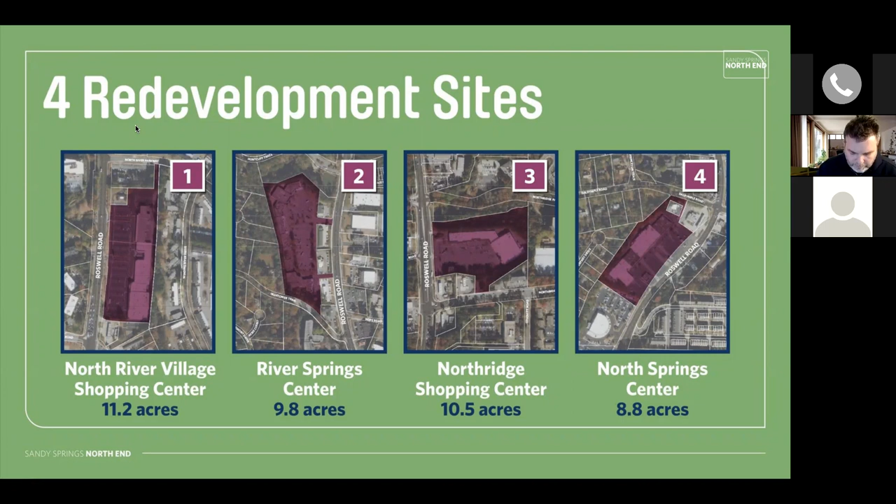For those of you who have been with us throughout this entire planning journey, you are very familiar with the 4 sites that we have. But if you have not, we have the North River Village Shopping Center up on the northern end of Roswell Road, River Springs Shopping Center, which used to be Loehmann's, Northridge Shopping Center at Northridge Road and Roswell Road, and finally North Springs, which used to be Big Lots.

Just a reminder of what this plan is. It's essentially a conceptual exercise. We're just looking at what is feasible, what's not, how these sites and similar sites could potentially be redeveloped in the future. We also wanted to understand the community's preferences for future development and represent that in our finalized concepts. What it's not is a zoning exercise, as in we're not rewriting the code, but we are making recommendations to change the code to make design better and any kind of redevelopment work better. This is not by any means a final design for all 4 sites. In fact, we even have 3 per site. So it's just kind of an ideas exercise.

The goals of this have been to ensure a variety of housing options to accommodate all types of residents, to improve multimodal connectivity throughout the North End, starting with these 4 sites and Roswell Road. We've wanted to model how mixed-use environments can work in Sandy Springs, build upon the existing green spaces and parks to create a cohesive public space network, and attract and support local businesses within the North End.

What we'll deliver is, again, 3 illustrative concepts for each of the 4 sites. One conforms to the current code requirements. The next one is a little bit more creative and requires minor adjustments. And the third one, we could just think completely outside the box and may not be bound by the code. Then with those, we will have rough cost estimates of each concept, some financial feasibility for each one, and then recommendations for funding and zoning amendments.

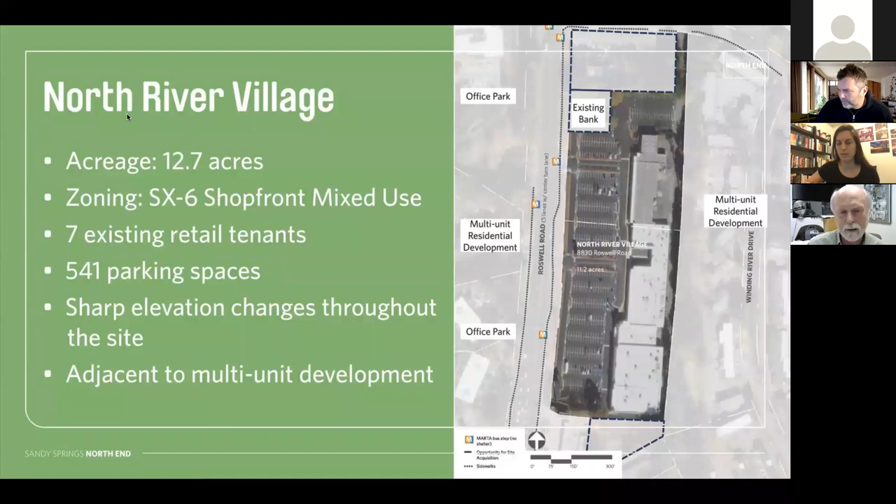Since the last schemes we've shown you, there was a good bit of interest and discussion around the idea of looking at additional green space on all the sites, but especially this one. As Jonathan and Sarah have said, this whole study is about trade-offs, and we're going to be talking about how we achieve that additional green space, because somebody has to pay for it fundamentally. So in options 1 and 3, which are the denser of the three schemes, we are looking at the addition of a 1-acre public park that was not part of the schemes previously.

We've also excluded from the analysis some of the infill development we had shown previously as a possibility to the east of the North River site, so that's no longer part of the image you'll see. And finally, in the third, most dense scheme, we've looked at even taller buildings than what were considered previously, just to see how that might change the financial picture for the options.

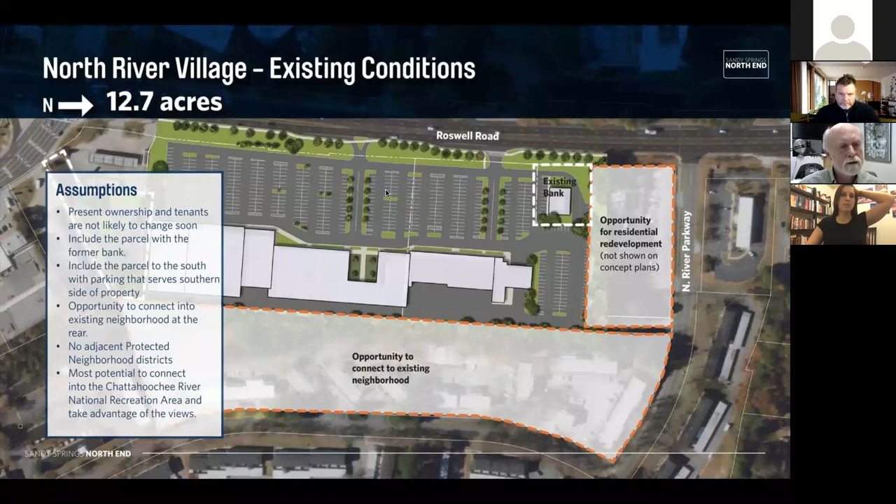That courtyard in this scheme has survived as a 2-story courtyard space that would be a food hall and the entertainment focus of this neighborhood, with some office perhaps on the upper floor. Immediately in front, where there was an additional mixed-use block with a parking garage, that has now been replaced by the park I described, and a smaller block of townhomes. That's where the P2 indicator is, and those represent the 2 perspective drawings, the 3D massing studies you're about to see.

With the removal of that block, that reduced the density of this plan. So option 1, the vertical mixed use scheme, essentially achievable with minor changes to your existing code, would yield a total of 524 residential units. You see the summary in the lower right, and a substantial amount, 130-some thousand square feet of commercial. That residential density is about 41 units per acre.

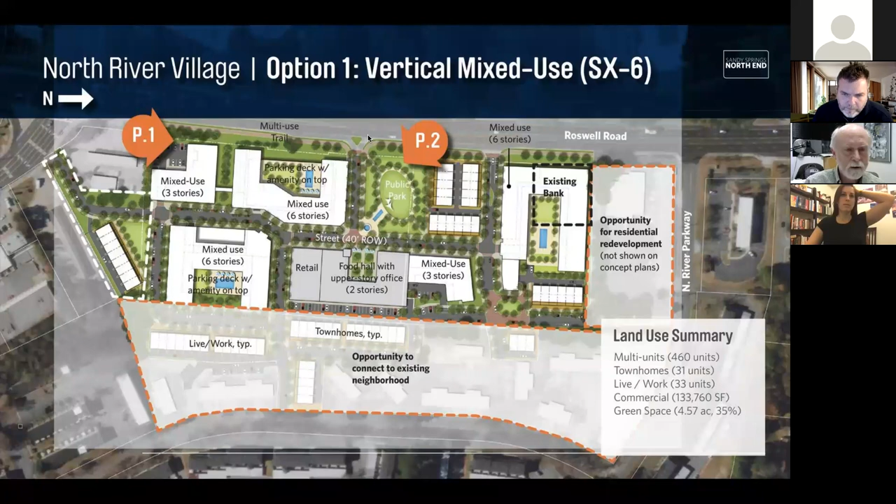If we go to the next slide—remember, this is not intended to represent the architecture per se, this is just basic massing—so what does that density look like on this site?

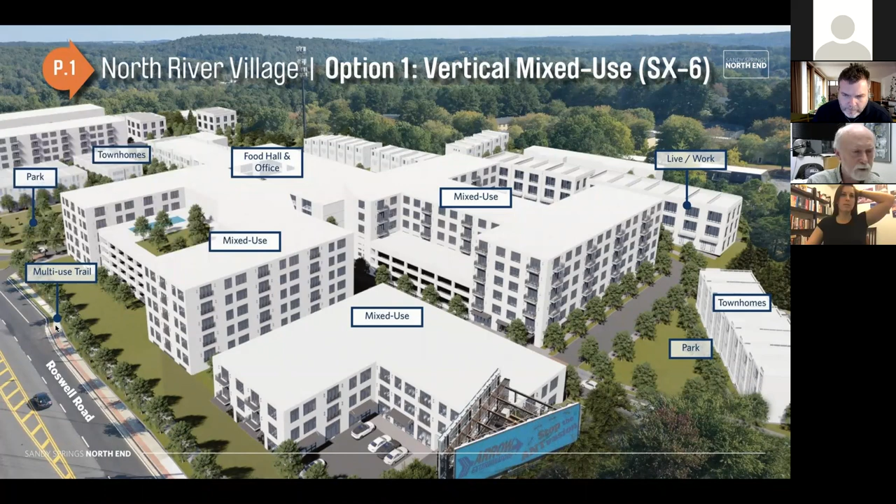In the first of these two 3D drawings, you see Roswell Road to the west in the lower left corner, and you can just barely see the 1 acre park on the left side of the screen. This gives you an idea of the massing that scheme might represent. You see there are some parking structures that would be partially above grade, visible from Roswell Road along the frontage and deeper into the site. Those can be concealed with landscaping, but they're there.

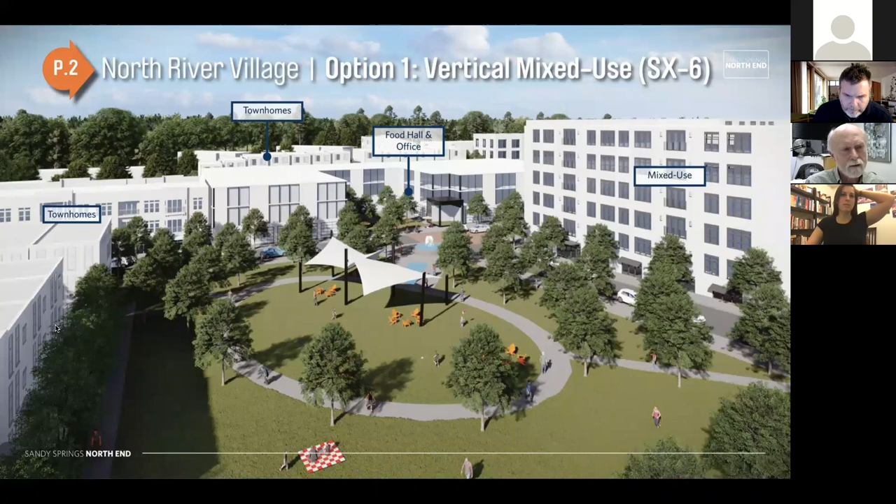This is a view looking into that 1 acre park, to give you a sense of the scale of that space, and again the trade-off that would represent. This would clearly be a desirable thing to have, but because it has to be paid for somehow, the next slide talks about some of those trade-offs.

This is a bit of an issue with any of the mixed use higher density schemes you're going to see, because they all require structured parking to provide enough parking spaces. And what we've concluded is that of the 4 sites we've looked at in this part of Sandy Springs, the rents achievable there would make it difficult to justify the expense of structured parking.

We're not quite there with the rents that market rate would achieve in those areas, but we think it's doable here. This is probably the most likely of the 4 sites where that would be more attainable in terms of rent structure, because of the proximity of the river and the fact that the city is engaged in a river access study now that would provide access fairly near this site.

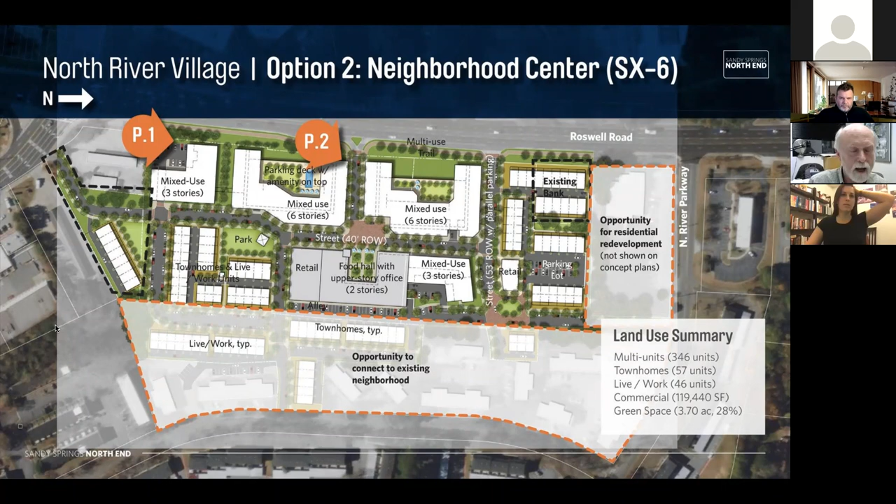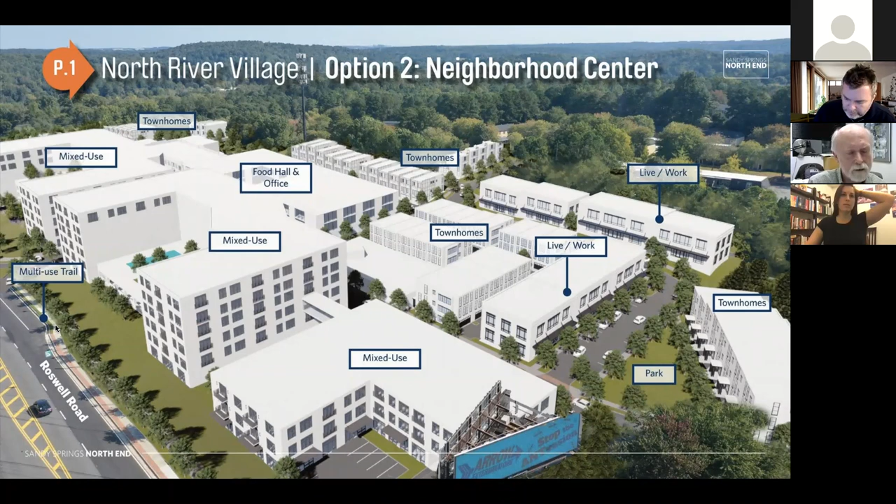And again, the same view looking from Roswell Road, or similar view. This gives you a sense of what the multi-use trail might feel like as you pass along the frontage, with a combination of 5-6-story buildings and some lower garage structures. This garage structure may in fact have only 1 floor exposed to view, depending on how the grading is done.

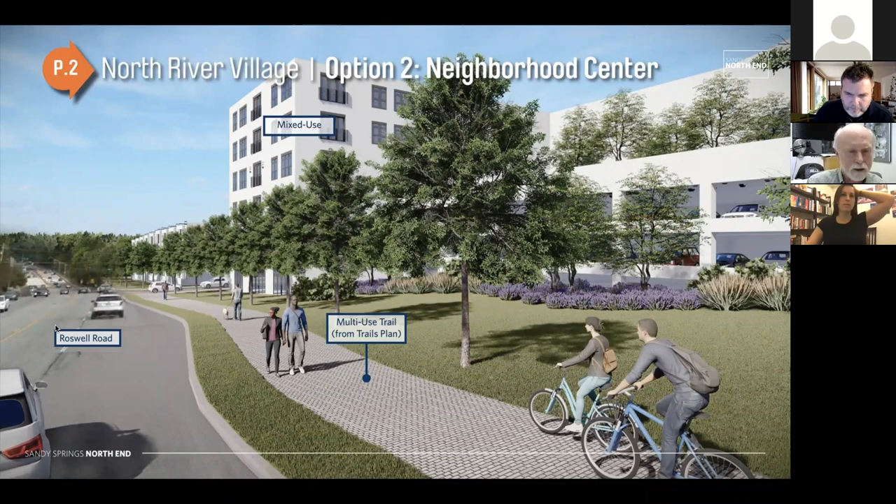So next, we'll talk about feasibility of this scheme. This one also works, it's a green light. The reason it works at a lower density is that we're not trying to pay for that 1-acre park. So again, trade-off.

Otherwise, I think this outlines some of the things we would suggest in terms of adjustments to the code to make this kind of plan work, some of which apply to the previous scheme as well. But they have a lot to do with the way standards are currently set for how townhouses are built. We would want to permit smaller lots and maybe narrower streets.

And then some of the structural requirements currently in place for taller buildings, if possible, we would want to see those adjusted. All right, and then we have one more scheme on North River, which is, as I mentioned, looking at what would happen if we went to taller buildings. This scheme looks essentially identical to scheme 1, option 1, except that we get substantially more density.

Instead of 524 units, this one would yield 892. So that goes up to 70 units per acre. With that kind of density, the idea represented here is you could pay for a park.

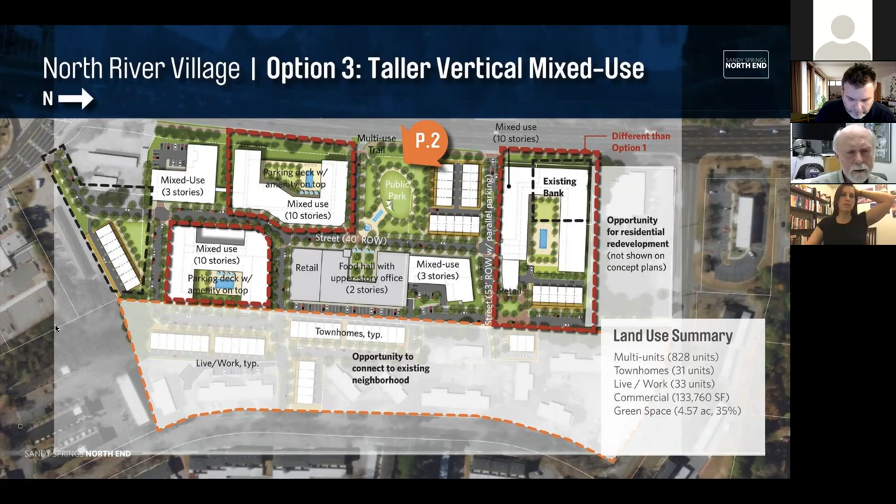You could probably also start to provide a substantially larger number of affordable units, keeping in mind what Jonathan said, that taller buildings are more expensive to build, but still that added density gives you more latitude to provide that broader mix of price points. So I think those are the options there.

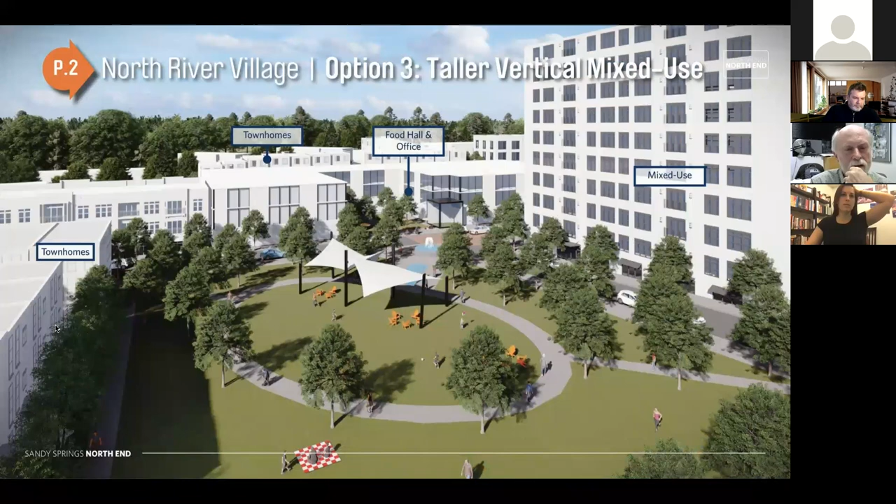One more page that looks at views from the ground level. We had 6-story buildings, now we have 10 shown in these views in some of these locations. Certainly that's a different impact, but from the ground, it probably doesn't feel all that much different, honestly.

Again, green light, same concerns or issues regarding how we might need to change the code. So that's sort of the story on the North River site.

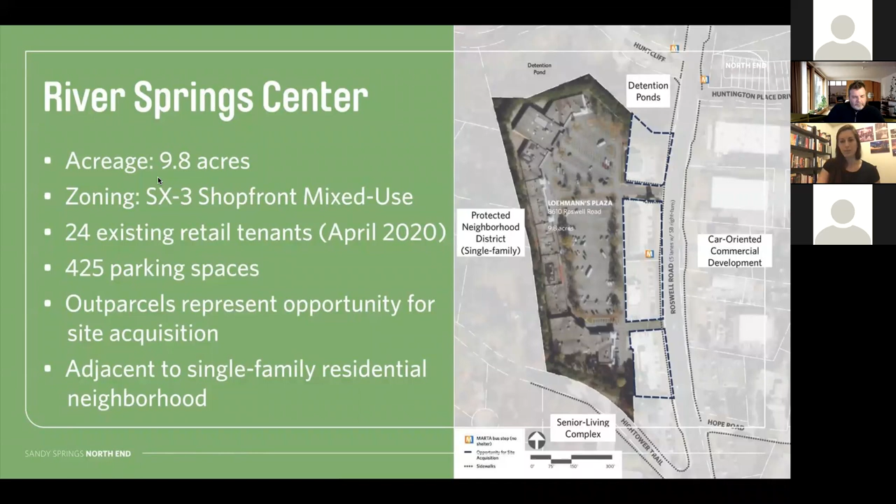Again, this is the existing conditions, north is to the right. Our assumption on this site is that it's better suited for residential because it's separated from Roswell Road, so commercial development wouldn't be as visible, and it would serve as a transition into the existing neighborhood to the west and north. We're also trying to keep the amount of commercial space on any of these sites relatively low, just because of the demand. These parcels outlined in red are opportunities to connect into the site.

We used all three of the access drives as our new street locations. And as Bill mentioned, some of this may need to happen in phases, so we looked at where we could divide the site into feasible blocks for phasing of the redevelopment.

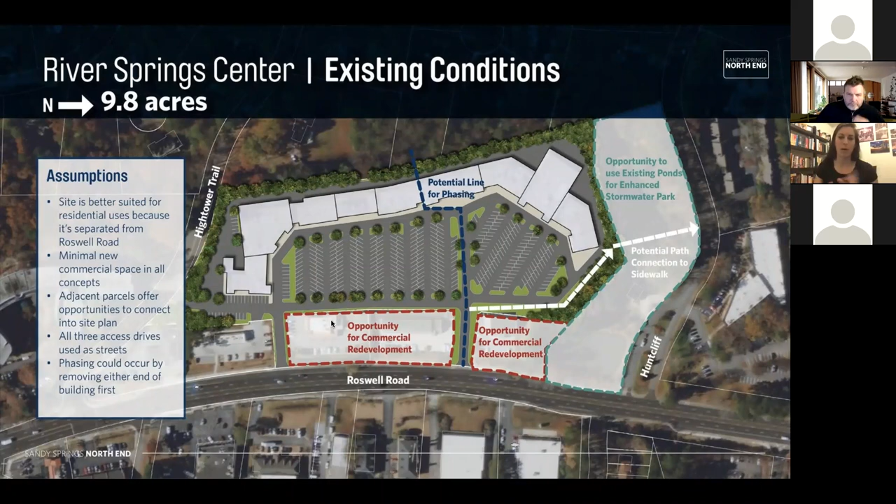So this is the first option, which meets the current code. All of the buildings are 3 stories tall. Any building that faces a street must have commercial on that street, so most of these are mixed use buildings.

We have the street coming in from Hightower Trail over to the one that leads into the parking deck for the mixed use building, the larger mixed use building. And then we have a smaller green space between the smaller buildings over here that could be activated by the commercial on the floor there with some multi-units on the top.

Another great opportunity we found, which we didn't fully design out but created a concept for in later versions, is this green space currently owned by the Huntcliff HOA, but there's a lot of stormwater detention there. Maybe there's an opportunity to create a usable green space out of that.

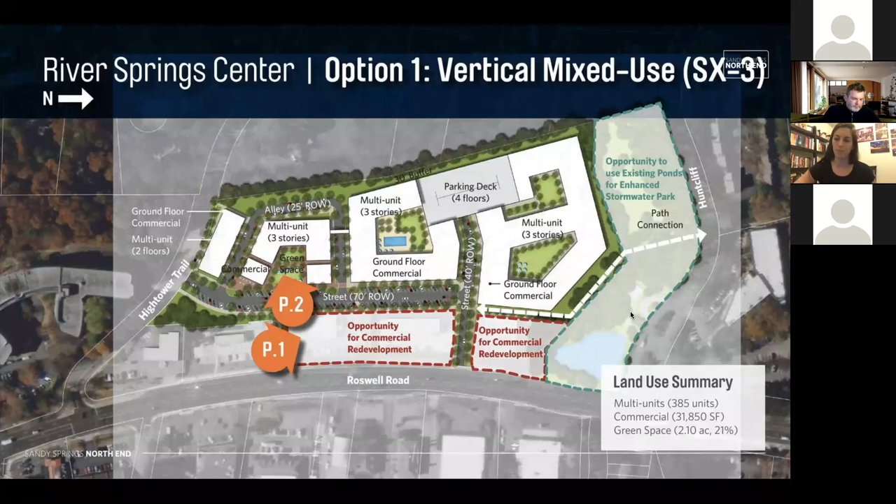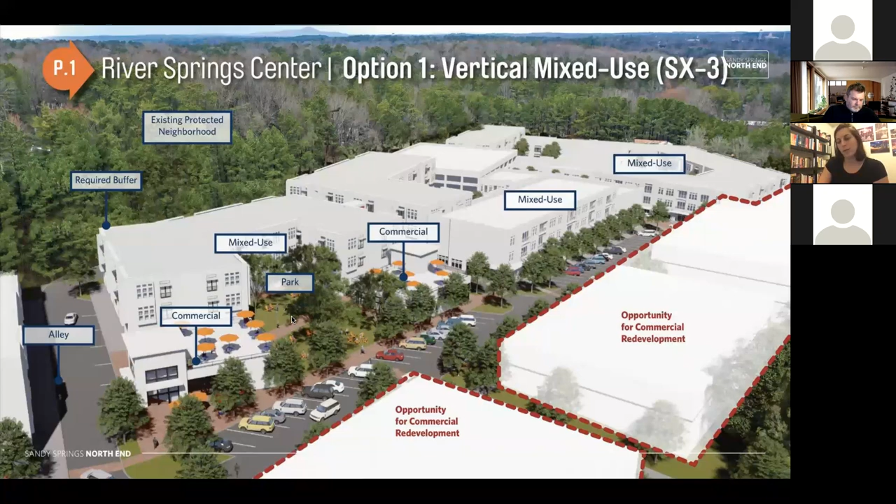This is showing the site looking north, showing how just massing these buildings in here relates to the proposed buildings. The green space here will be the eye level view right here from the street looking into that little plaza and green space with restaurants or any kind of commercial and residential around it.

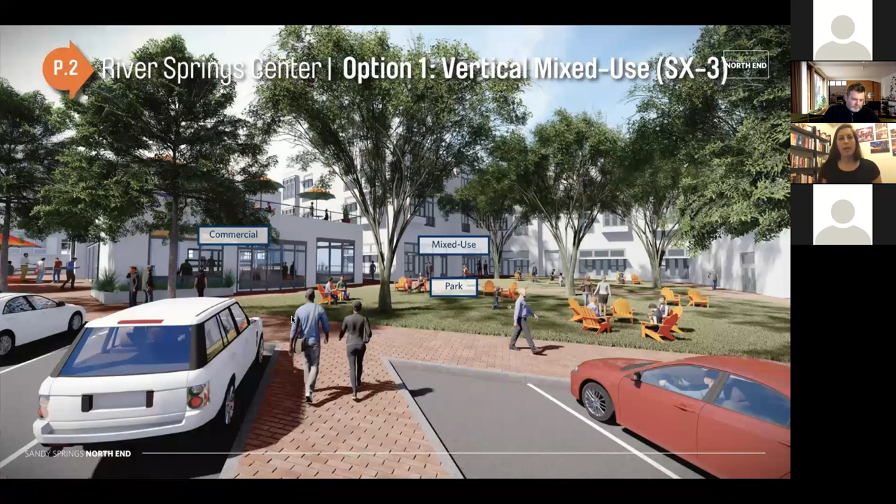This option works financially. However, as Bill mentioned and as Jonathan has mentioned, the structured parking does require higher rents, and it makes it a little harder to make it work for providing some of that attainable housing. With these mixed use scenarios, you do need the structured parking in terms of taking up less land. And while this works financially with the code, it doesn't allow as much creative design.

So if we wanted a larger green space, that would likely push it to the point that it might not work. So that's some of the challenge of the current code.

Along with that, the requirement that ground floor commercial needs to be on all streets within the development may lead to too much commercial space. And finally, some of the street width and design requirements in the current code limit the amount of developable land. So we would maybe need to squeeze those down a little bit to fit more green spaces or a little bit bigger buildings.

This second one here focuses more on missing middle housing. There are no parking decks on this one, but a range of housing options with townhomes, small multifamily buildings with 6 units each, some live-work, townhomes over flats that function like a duplex but vertical, and then some single family homes.

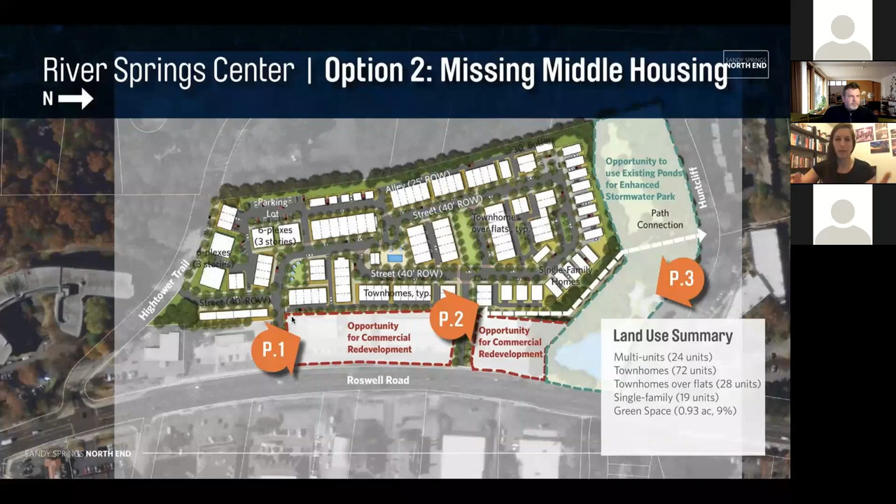This is a view again looking north at this site, showing how the commercial development could relate to the townhomes across the street, and some of these smaller pocket spaces between the buildings that start to make it feel a little more like a neighborhood.

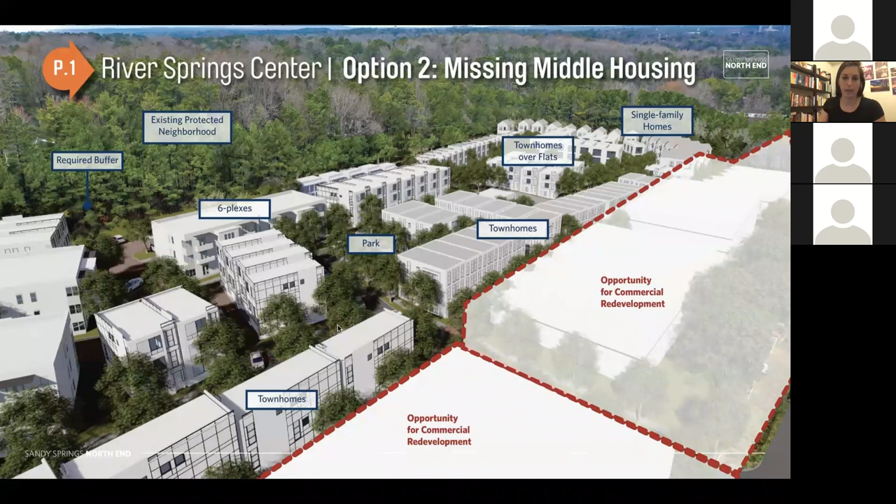And then this is looking from the northern end of the site, looking west into the single family homes and some of the townhomes over the flats, that potential enhanced stormwater park.

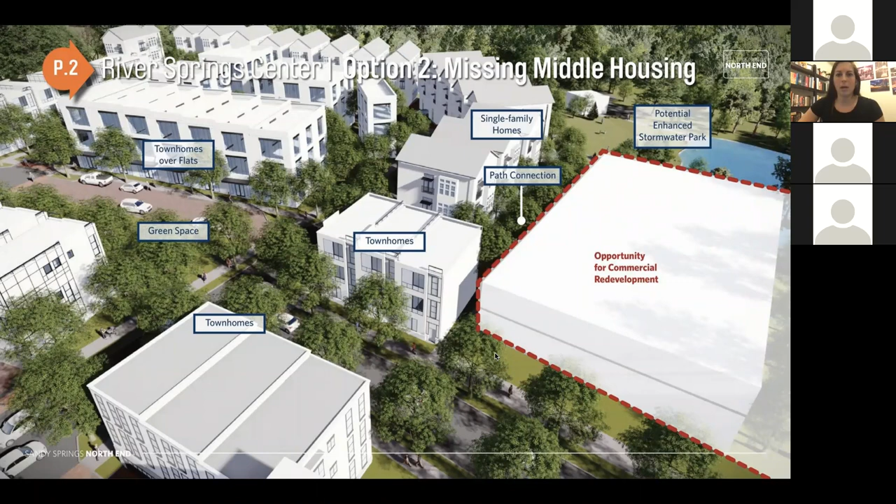And then if this current site that's a 1-story commercial were to redevelop, here's how that could look. This is showing just an example of a stormwater park, making use of the pond that exists there now, and how the buildings could front it and people could use the space.

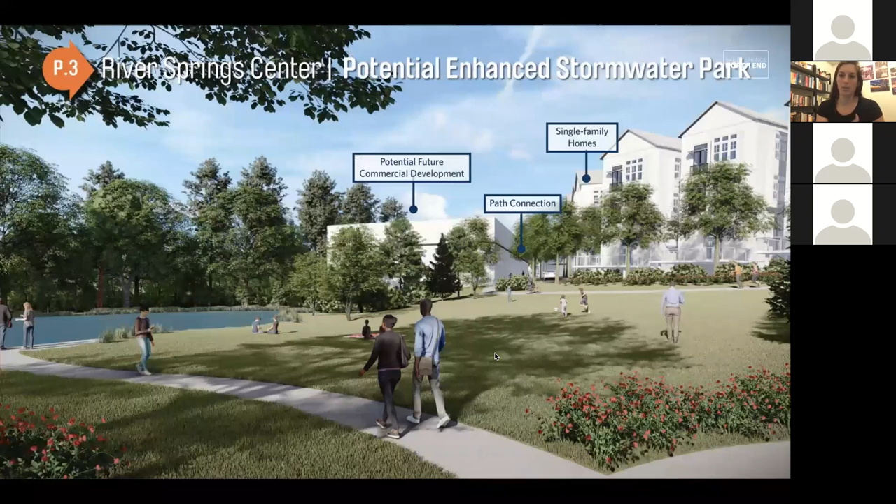This one actually does not work financially. It's mainly because the land acquisition and preparation costs exceed the potential revenue from reselling the lots and building the different types of housing. A lot of this is probably because the density is relatively low.

To make up that difference, there are things we could do, maybe keeping some of that mix but changing some of the design, and maybe that would help.

One way to make this work by the code is potentially rezoning it to a different zoning designation that already exists, or also reducing lot sizes for multi-unit townhomes and single-family detached units, and then again addressing the street width and design requirements.

This next one kind of combines the thought processes of the last two, combining some of the missing middle housing with a larger multi-unit building, keeping some of that retail and office mix, but with a much lower amount of commercial space. We have some live-work units, a small mixed use building on the southern end, townhomes, and then a larger multi-unit building that would be 5 stories, stepping down to 3 stories in the back.

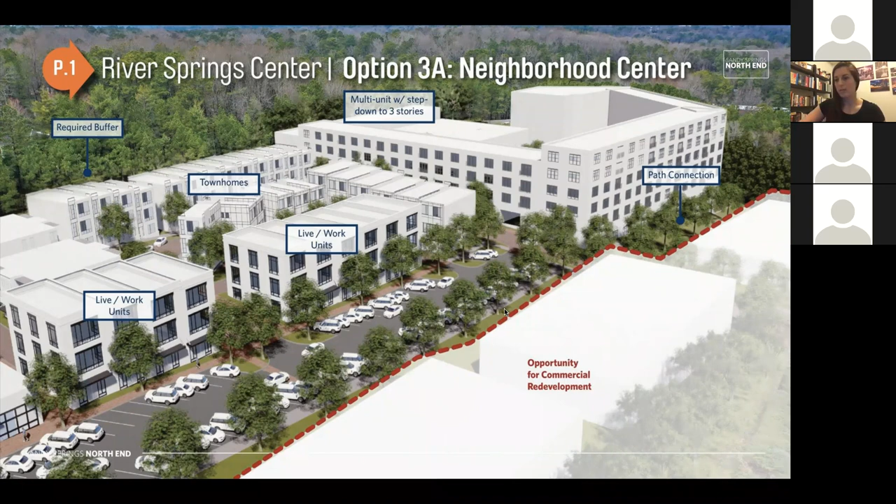This is showing what that would look like. You can see the building step down—5 stories closer to Roswell, 4 towards the middle, and 3 in the back. Some of the townhomes and live-work units face that new street, relating to the potential commercial redevelopment. And this is looking into that same green space park.

This one does work financially, but the structured parking could tip that, depending on how many units end up there and how big the building is.

In order to make this work by code, we would need to rezone either to RX5, a residential mixed use designation that allows taller buildings up to 5 stories, or SX6 with some minor modifications—allowing standalone multi-unit buildings, potentially height bonuses for taller multi-unit buildings based on incentives, and removing the steel and concrete construction requirements above 3 stories.

You can build a 5-story building using wood frame construction and make it more affordable.

And finally, the next one is that one, but the corner to the north is more townhomes and single family homes, townhomes over flats. So again, this is more focused on missing middle housing.

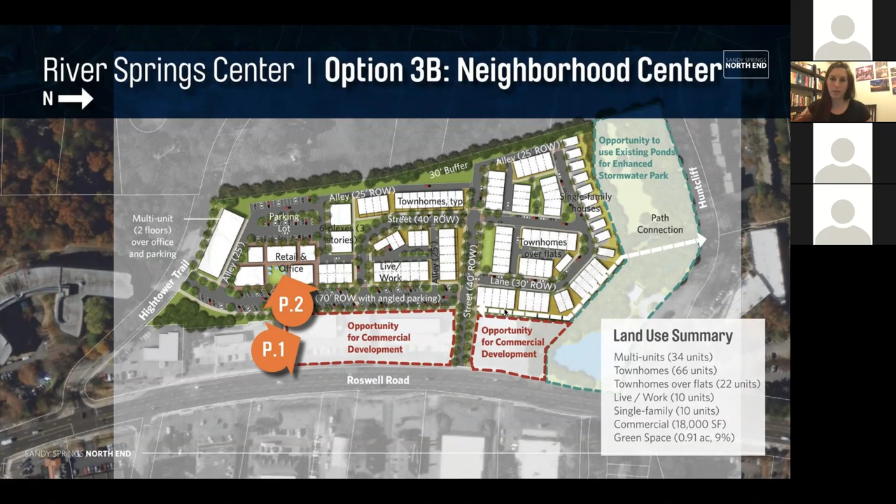There's no structured parking here. Everything is a parking lot, on-street parking, or the townhomes with their parking underneath. So this just has more of a focus on missing middle housing as well, with a little bit of retail and office on the southern end.

Sarah, can I interrupt real quick? You just said the word missing middle again. We had a question—can you define what missing middle means, please, for the group?

Generally speaking, we usually build the larger single family homes or the larger apartment buildings, and missing middle housing is kind of those smaller buildings in between, like the townhomes, smaller apartment buildings that you would see in older neighborhoods and things of that nature. If Bill wants to add more details, he's welcome to, but it's meeting that range of unit types that we don't typically see anymore.

Yeah, it's generally a strategy that other cities have tried to pursue. It's the way we used to build towns. Atlanta used to have all kinds of these missing middle building types that allowed for less expensive construction that still achieves greater density than a typical single family or townhome community might, and more diversity, and allows you to deliver more affordable, a mix of price points more affordably than going to the tall buildings that Jonathan was talking about.

So I think it's one of the things we wanted to explore in these schemes, and certainly this site that Sarah's working on has looked at how those options compare with those where you're pumping the density up with an apartment block, or a multi-unit block with structured parking.

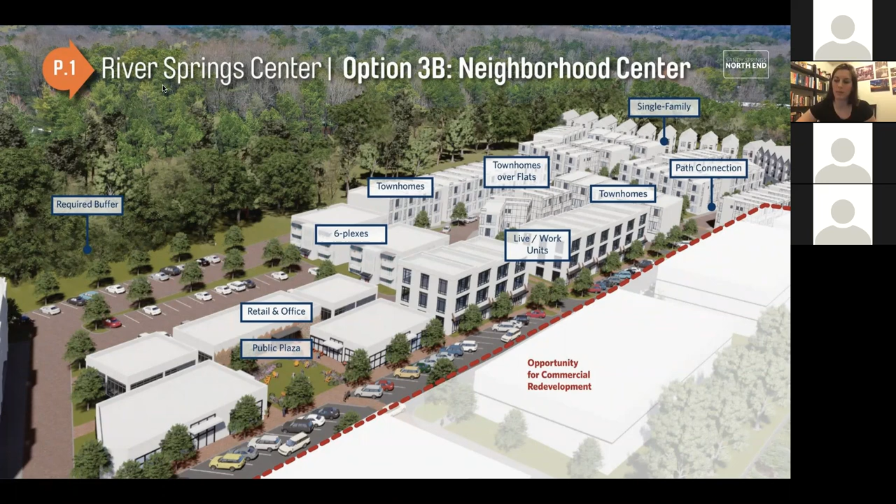Yes, so as we can see here, it does not work. Again, it's that land acquisition and site prep costs that Bill just mentioned. We could make it work by code, but we may need some kind of combination of a higher density building and some of these missing middle housing types with smaller buildings and fewer units.

So here's the next poll question about River Springs. We'll give you a moment while this question is being answered, and I think it's a good opportunity to answer some questions we're getting from multiple people that relate to all of these.

I'd like to ask Jonathan to talk a little bit about affordable housing. We're getting a lot of questions about whether these plans include affordable housing. Jonathan, if you wouldn't mind addressing whether or not those are included in any of these plans. All right, why do I always get the easy questions?

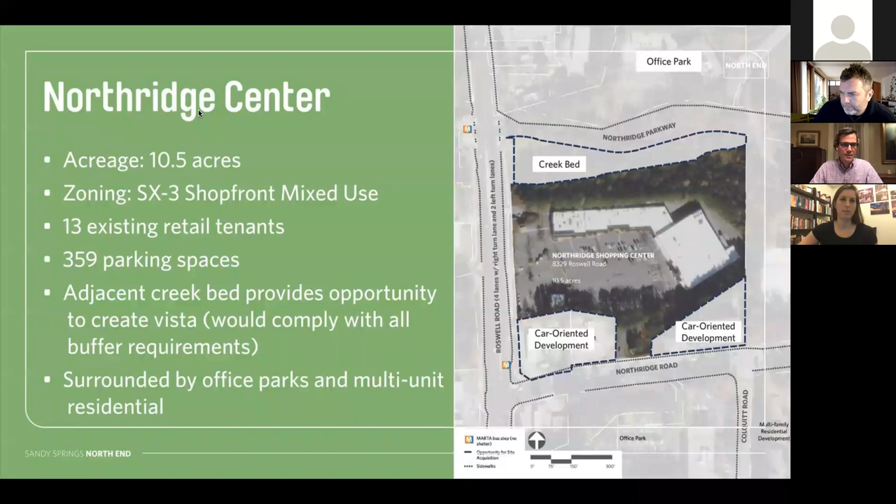Go to the next slide. So the Northridge Center, located here, essentially at the intersection of Northridge Road and Roswell Road. Primary frontage is along Roswell Road here with access off of Northridge. Same zoning as the last site Sarah reviewed, the SX3 shopfront mixed use. This center has 13 existing tenants, one currently in the old Kroger space, the large part of the structure that's currently Goodwill. And again, interesting topography on this site as we've seen in the previous two sites, with Northridge being the high point and starting to drop off. If we want to go to the next slide.

So what have we changed since we last spoke? Originally, we showed an option that tried to keep the Goodwill, but that was a really tough design to make work. So today all 3 options will assume that the Goodwill structure can be removed, and we're also adding connections to the multi-use trail along Northridge Road.

Some additional assumptions here: the site doesn't have great visibility because of the topography from Roswell Road, and there's extremely limited visibility from Northridge, again because of how the topography works on this site.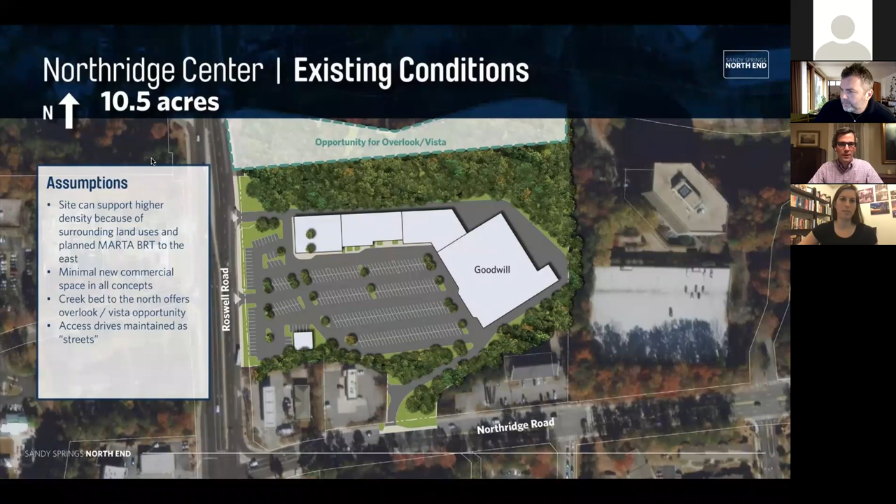The site does offer some great views to the north, though. Essentially all that wooded area behind the current shopping center, the topography drops off into a creek bed, actually an active stream, and it's quite lovely. We wanted to make use of that in our conceptual plans and highlight it as a feature. Because of the limited visibility, we see minimal commercial potential here, with more focus on the residential aspect.

Next slide. So now we have option 1, keeping with the existing zoning. As you can see, we have 2 different residential types here, giving us a total of 148 units on site. We're limited to 3 stories maximum with the existing zoning.

Based on that, we're limited on how much density we can put on the site. The buildable area for the site is relatively limited because we have a lot of topography constraining that. So with this site, we're offering some retail, pure retail buildings along Roswell Road as you enter, then coming into mixed-use structures with commercial storefront on the ground floor and residential above.

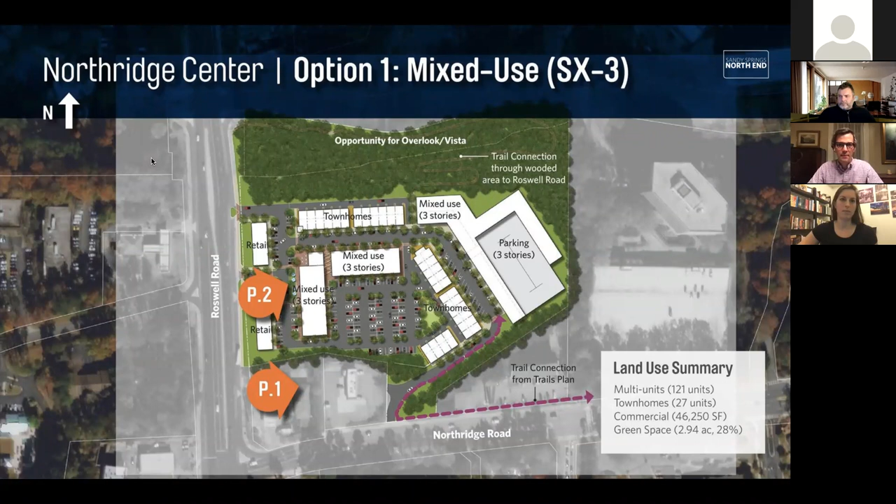We're also assuming that with a conditional use permit under the existing code, we can implement some townhouses as seen here, and then a larger mixed-use building in the back that would have a parking structure.

Next slide, we should be able to see some views of how this might look. This is looking northeast with Northridge Road in your lower right-hand corner. You start to see how these structures might form this space. The larger mixed-use building needs a parking structure because of the limited buildable area, with the remaining structures either self-parking like the townhouses, or making use of surface lots.

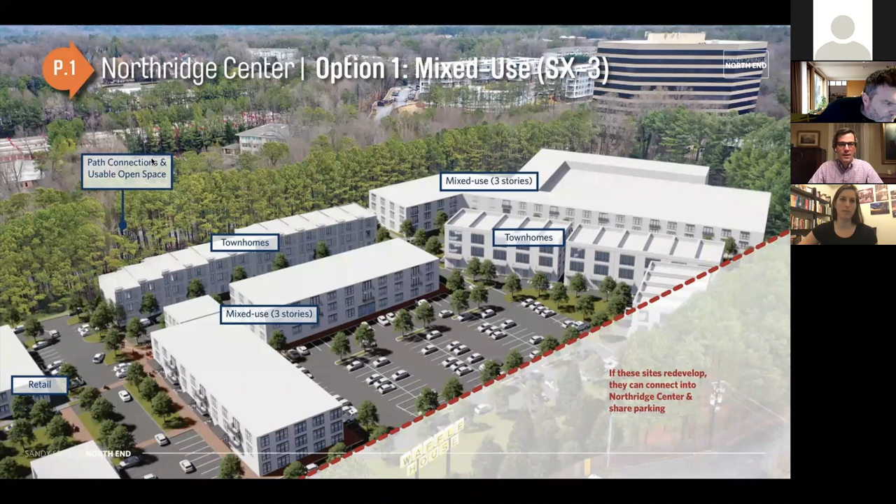Next slide. Unfortunately, this one is not financially feasible based on the grading criteria. Essentially, just from the land acquisition and prep cost involved, we're not getting enough density on site. There are 148 units here, which puts it at 14 units an acre. Challenges with the code: the ground floor commercial is putting too much commercial on this site, and the existing street designs take up too much room, not allowing us to go vertical to make this work.

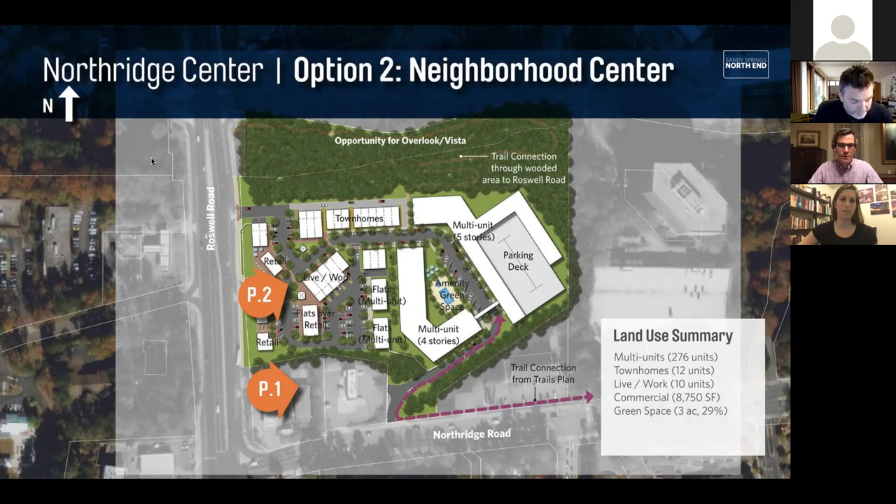Again, you can start to see we're trying to work with the building locations to open up as much plaza space as possible. As you can see next to that P2 arrow, it's pointing towards one of the plaza spaces, which we'll see in one of the renderings shortly, as well as opening up some amenity space for the multi-unit buildings on the east part of the site. We start to get some nice green space and pool space for those uses. Go to the next slide.

So you start to see how the massing works here, and you'll especially see this in our third option. The ability to go vertical actually fits in quite nicely at this site, being next to the high-rise office building to the east, which is about a 12-story building. There's also some complementary multifamily adjacent in the area as well.

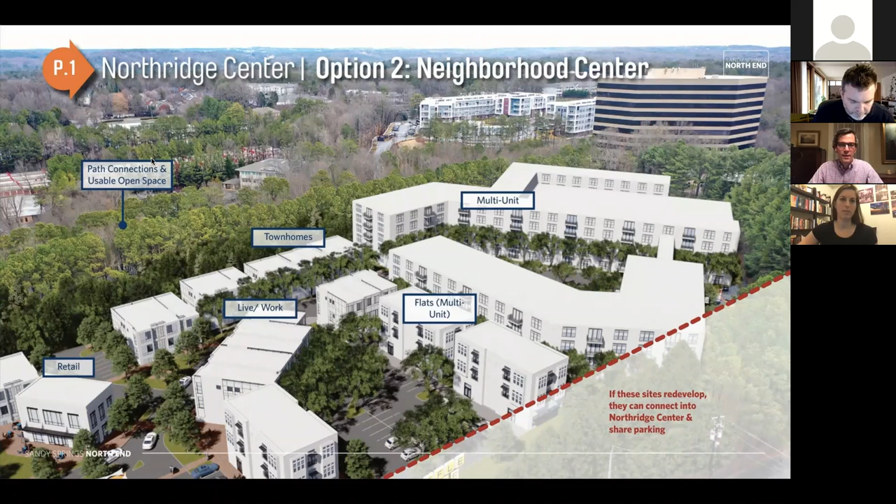So again, unfortunately, this one is not working based on our current grading strategy. Similar to our first option, with structured parking we're just not getting enough units to really make that feasible. Actually, it is feasible, but it would require higher rents, which isn't an ideal situation. Typically a developer would want to see in the range of 300 units before relying on structured parking.

But how to make this concept work by code? Again, allowing standalone multi-unit buildings, removing the requirement of ground floor commercial, and increasing building heights to increase density. The steel and concrete construction requirements do hinder some of the building types on that site. As Sarah mentioned earlier, you can get up to a 5-story building with stick or wood construction if you have a concrete podium, which can get you up to that height. So there are ways to do it, and it's something just to consider.

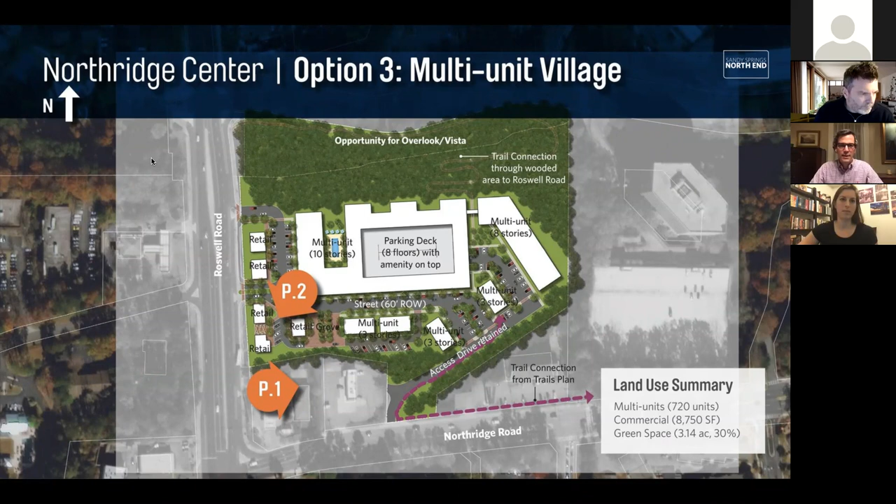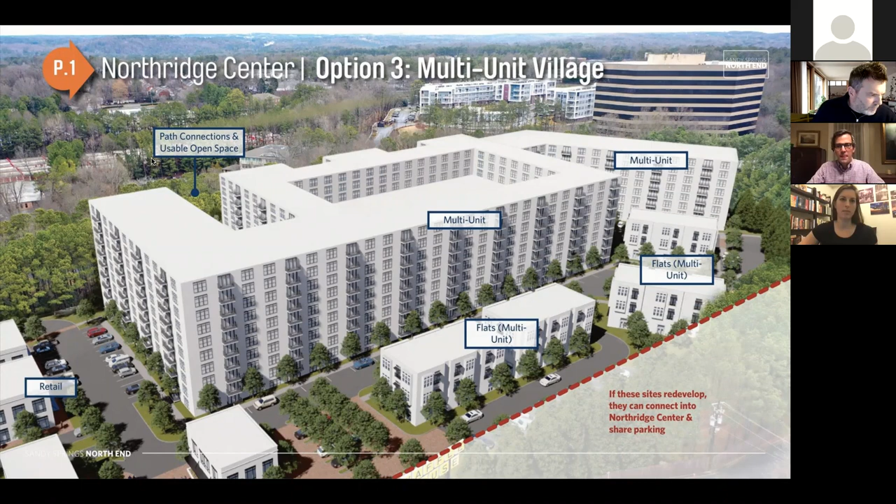Let's go to some renderings to talk about the design a little more. This massing model illustrates a bright white building, which might look a little shocking, but it's definitely something that could be considered, and it helps with this site, being a limited developable area, to intensify the density. We're getting about 68 dwelling units per acre on this 10-acre site. I believe option 3 for the site Bill presented first was getting close to 70 units per acre on about 12 acres. We start to see how this can take shape, complementary with existing land uses, with the 12-story office building to the east, surrounded by existing multifamily and office uses. So this one is not totally out of the question for that height.

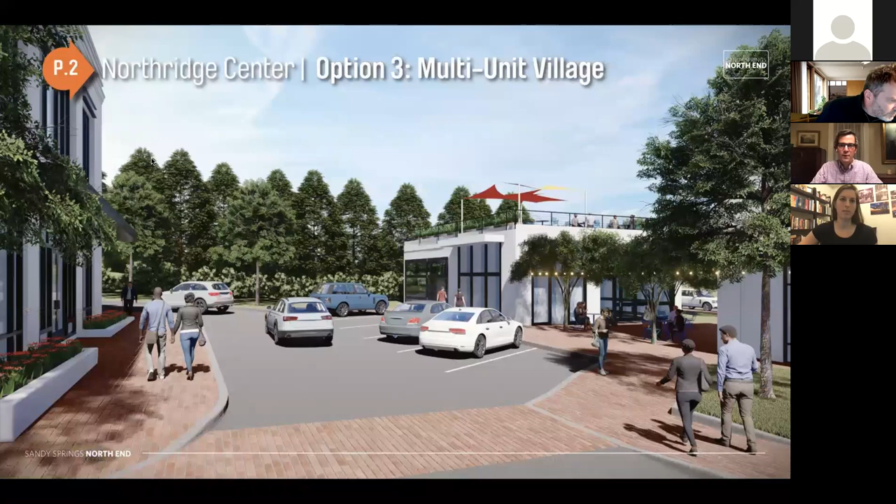This is a very similar rendering to what we saw previously, because we are maintaining that retail frontage you see on the right, along Roswell Road, and bringing pedestrian activity to the interior through a mix of hardscape plazas and small pocket parks.

So we get to one that is feasible. I assume there might be some questions about this, so Jonathan might chime in to correct me if I'm wrong, but I'm pretty sure it's just really based on density here, getting those numbers up to make this feasible. And then how to make this work by code.

Again, very similar to the last option we reviewed, this involves being able to increase the building height, work with the current regulations on street types and widths, possibly make some of them a little thinner than what's currently on code, to give more buildable space to the actual residential units, and then getting rid of the ground floor commercial requirement.

Next slide. And so this is now where we're ready to vote.

Sarah, I don't know if you're going to chime in, but same as the last two options we saw, vote on your preferred. Option 1, 2, 3 or maintain the site as it is. And again, if you joined us late, the menti.com address website is at the top with the access code.

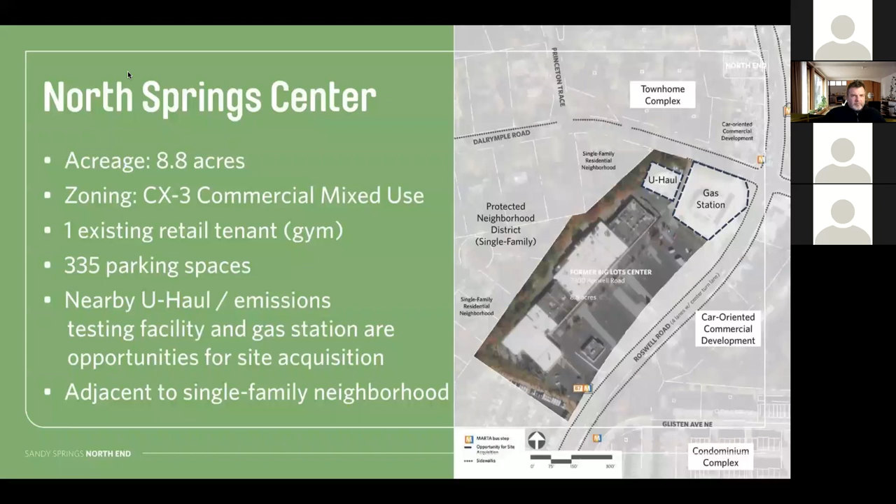There's currently one existing retail tenant. The zoning on this site is slightly different than the others. It's a CX3, which is a commercial mixed use district. The difference here is that the ground floor commercial requirement is not within this district. And this one is again adjacent to a protected single family neighborhood district by code.

The changes we've made based on the input for this site: we've added a pretty significant large green space on the northern end of the site for all three options. We had some concepts in the last iteration that had much higher buildings. We received a lot of feedback that that was too much, so we reduced the building heights on all three down to 3 stories maximum. And because of these design changes, we had to redesign some of the mixed use and multi-unit buildings to accommodate the green space.

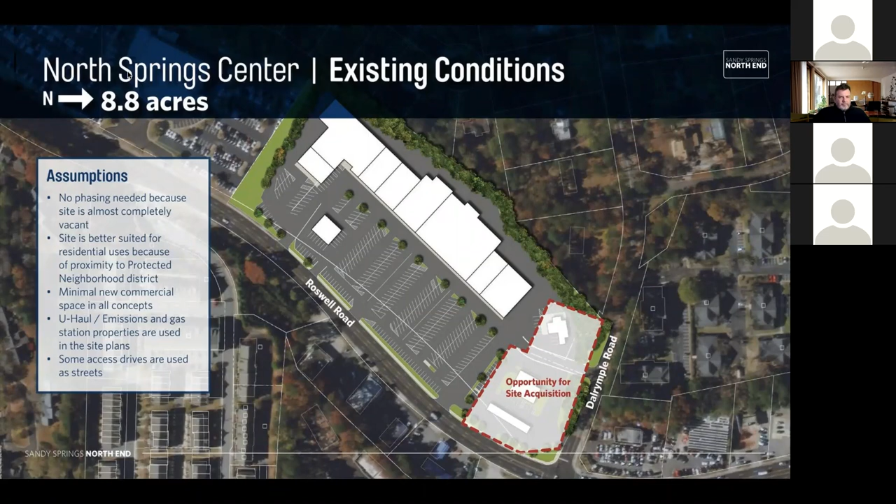So this is the existing conditions, north is to the bottom right. Our assumptions for this site are that no phasing was needed because the site is almost completely vacant. It's better suited for residential because of the proximity to the single family residential around it. Again, we're trying to recommend minimal new commercial space, and all the concepts and those 2 properties on the northern end by Dalrymple are included in the site plans.

So this is the first option here. We have the new green space, which is on the north side of the site, but it's at the bottom of the screen. We have a larger multi-unit building on the southern end of the site, which is at the top of the screen, and then some mixed-use buildings here in the center, and then townhomes in the back that would transition into the neighborhood.

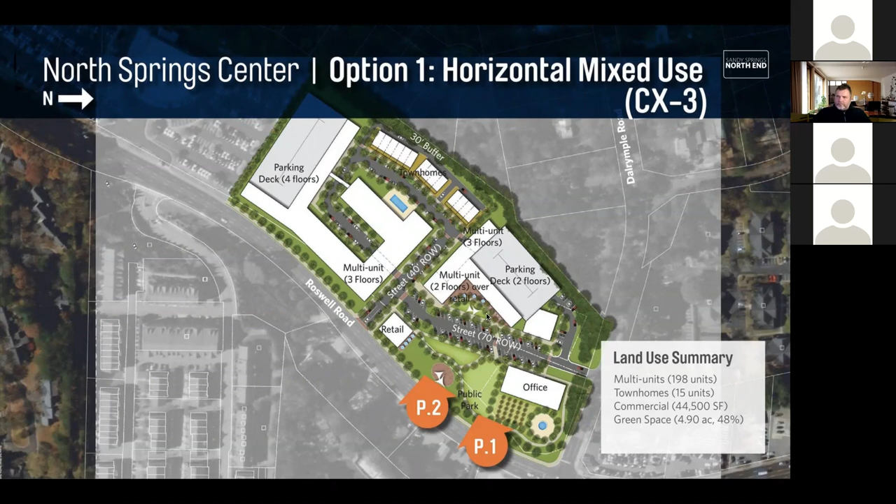But this green space is much more than an acre, and it can provide a significant amount of open space for anyone in the area, and we envision it as more of a public park. As you can see with the mixed-use building just on the other side of the street, that plaza space starts to relate well with the street and the park, kind of creating one big unified space.

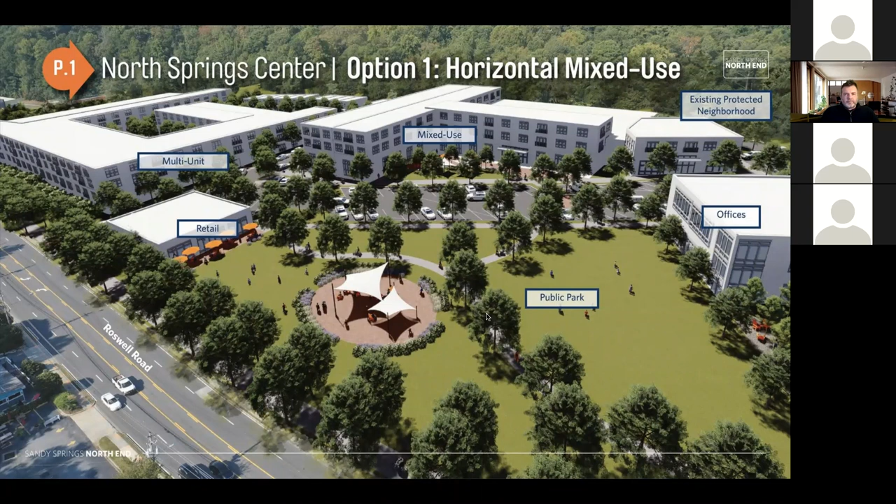So this is a view looking into that, looking to the southwest with that mixed-use building in the background, just showing the scale of the park compared to the buildings next to it. And then this is an interior view of the park, just showing the relationship of the park to the buildings.

So this one does not work financially, mainly because of the density being too low, as with all the concepts. Building that green space also costs money, so it's a matter of where that money is coming from. And the structured parking requires higher rents than what the market supports.

The challenges of the current code: 3-story buildings make it difficult to support parking decks. We have a lot coverage requirement here that we've exceeded, but in some of our earlier concepts, hitting that 85% lot coverage requirement - meaning buildings only take up 85% of the land - was a little difficult to meet and make work. Once we exceed it, it starts to not work financially.

The second one here, we've reduced the green space slightly and put some larger buildings around it to activate the space more, giving people more of a reason to be there. We have a few mixed-use buildings with retail or office, some form of commercial on the ground floor, and then 2 floors of residential above.

This has much more of a mix of housing options, again hitting that missing middle range, with some smaller walk-up apartment buildings, some multi-unit buildings on the southern end, some small single-family homes next to townhomes, and then townhomes over retail - kind of similar to a building on the Beltline by Studioplex, where there are townhomes over retail that front the Beltline.

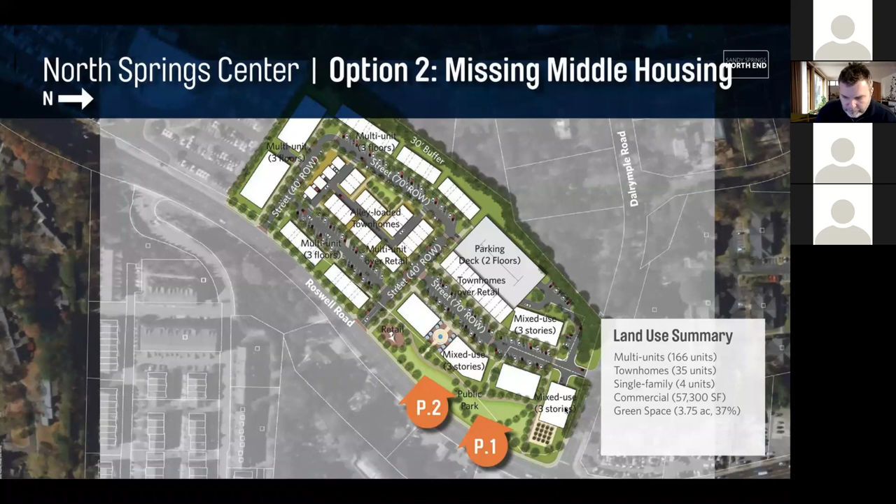And some mixed-use buildings on the northern end. Again, this view shows looking into the park and how the massing works with all the different unit types, and how the park works with the rest of the site. This mixed-use plaza between those buildings really starts to activate that space and flows out into the park quite nicely.

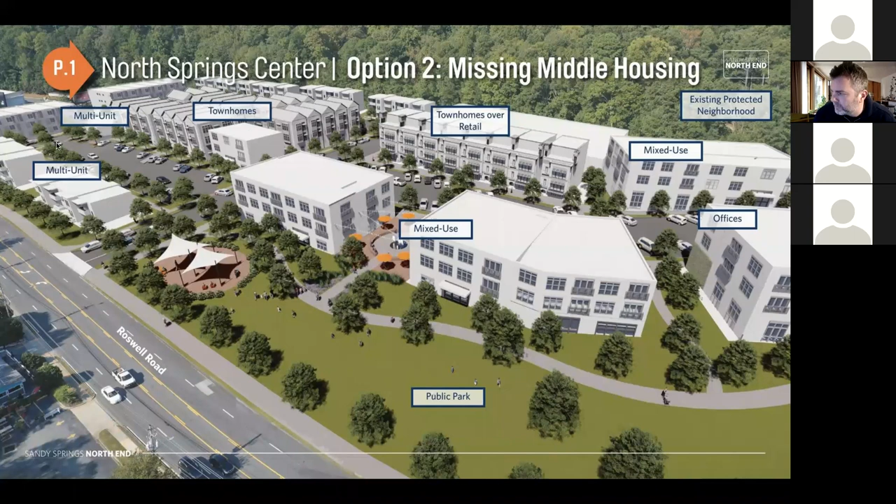And then we can see that the building size really becomes a lot more granular with these smaller townhomes and multi-unit buildings on the southern end. Again, an interior shot of the green space, just showing how that could look and work.

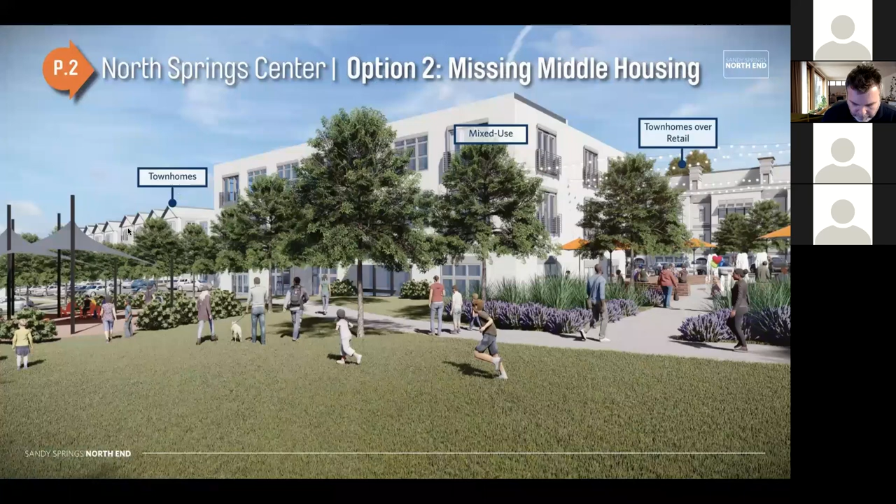This one could be feasible with some design modifications, maybe increasing density by making some of the mixed-use buildings slightly taller, with some public-private partnerships - having the city help with either housing, the green space, or some of the public infrastructure. But it all really comes down to the density and how much parking costs.

So to make this work by code, we would potentially rezone to RX3, which allows more of a mix of housing options than the CX3 commercial does. We would need to reduce the lot sizes currently required in the code for some of these units, and then reduce the street width and design requirements, which applies across the board on all of the sites.

And finally, this one further reduces that public park, but we do have another public plaza on the other side between some retail buildings. So the space is pretty comparable, it's just divided a little differently. But you still get a pretty sizable park - I'd say a little over an acre - with a couple of plazas that lead to the street.

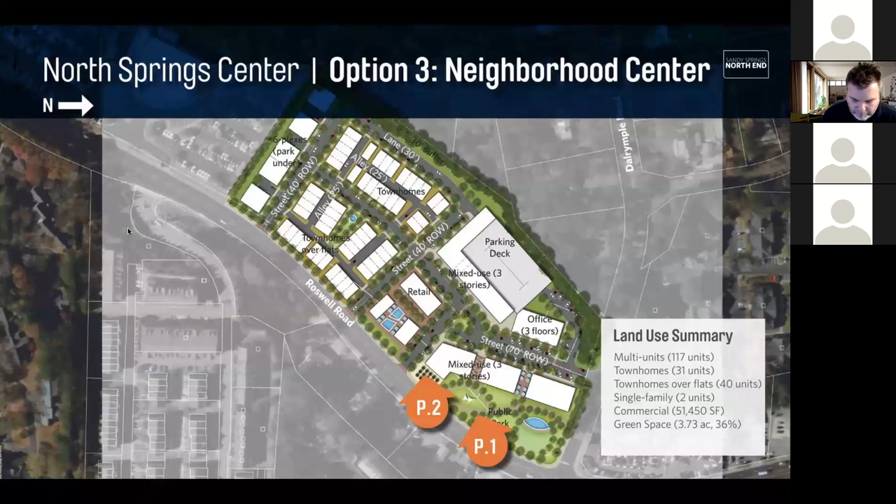And some mixed-use buildings around it. We have the mixed-use building served by a parking deck and maybe some office towards the back. On the southern end, again, a mix of housing with townhomes over flats, which are kind of treated like a duplex but vertically, and then some smaller multi-unit buildings on the very southern end next to the car dealership.

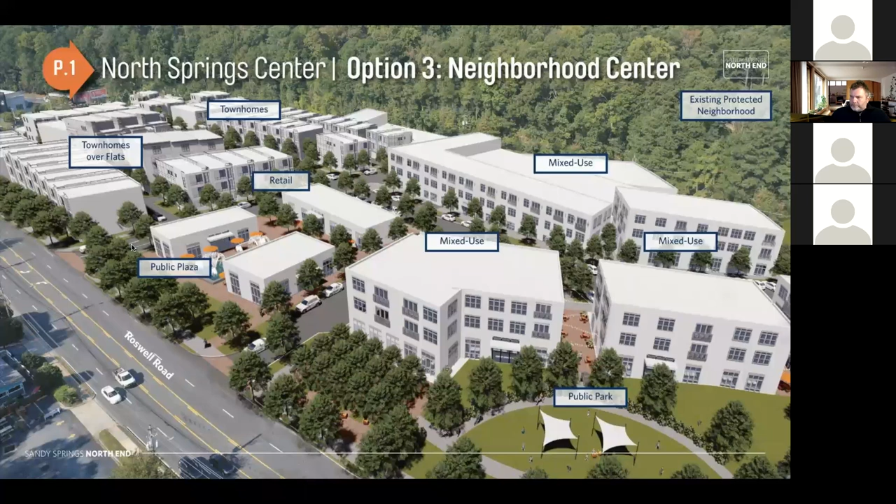This view doesn't show as much of the park, but starts to get at the massing of the buildings we're proposing, though you can still see how the park relates to those mixed-use buildings around it. There's also a small public plaza between these one-story retail buildings and how that can be activated. Again, another view of the interior of the park, showing the relationship between the buildings and the public space.

So this one, very similar to the last one, could work financially if there are some modifications, a public-private partnership, or a developer decides to take lower returns. This one has the same requirements as the last for what would need to change in the code: potentially rezoning, reducing lot sizes and allowing different types of housing units, and adjusting street width and maybe lot coverage requirements.

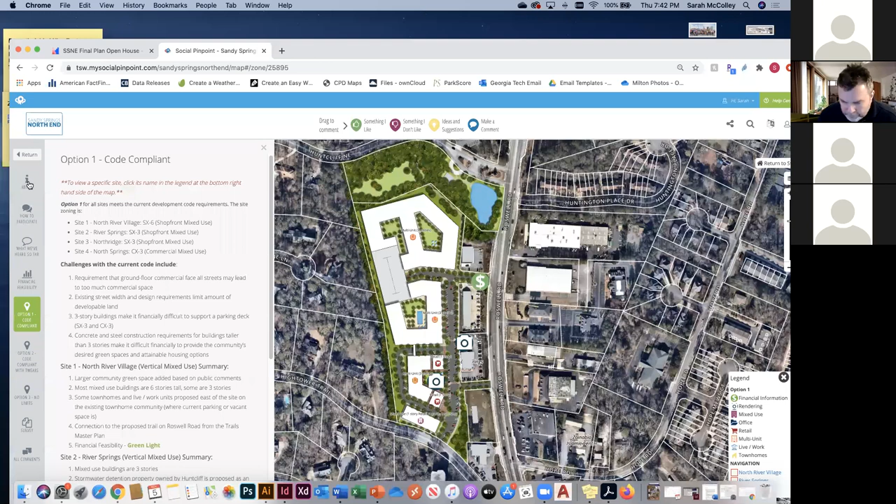When you come into the site, you will arrive with this larger scale map of the whole area, and it explains how to participate once it pops up, showing how to navigate between the sites. In general, the sidebar will zoom by option: option 1, code compliant; option 2, few modifications; and option 3, out of the box. So first you would click which option you want to view.

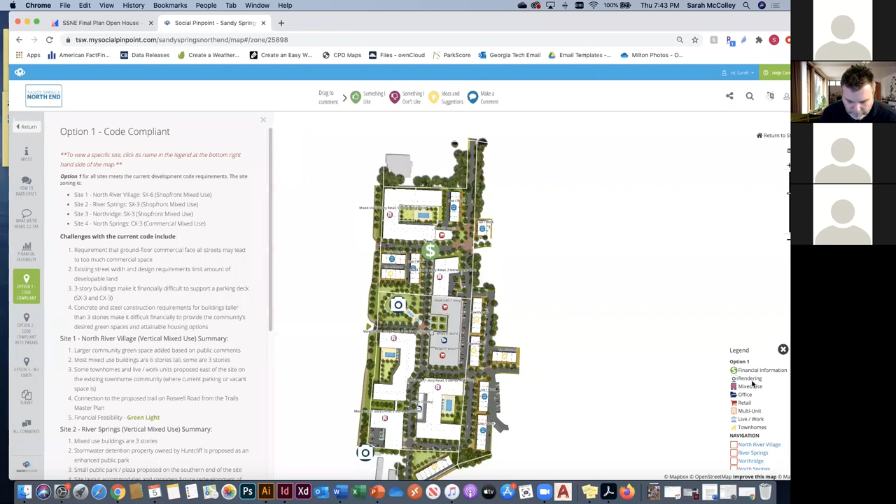Then to navigate between the sites, you can either zoom in, which could take some time, or go down to this legend at the bottom, where each site has a little link, so you can navigate exactly to the sites themselves over here in the legend. Key point: navigate first on the left-hand side between the option you want to see, and then navigate second on the right-hand side to the site you want to go to.

Within each of these, we have the financial feasibility explanation and whether or not it works, indicated with dollar signs. And with the camera buttons, we have popped-up images. There's a note up here, but you can click on them to make them larger.

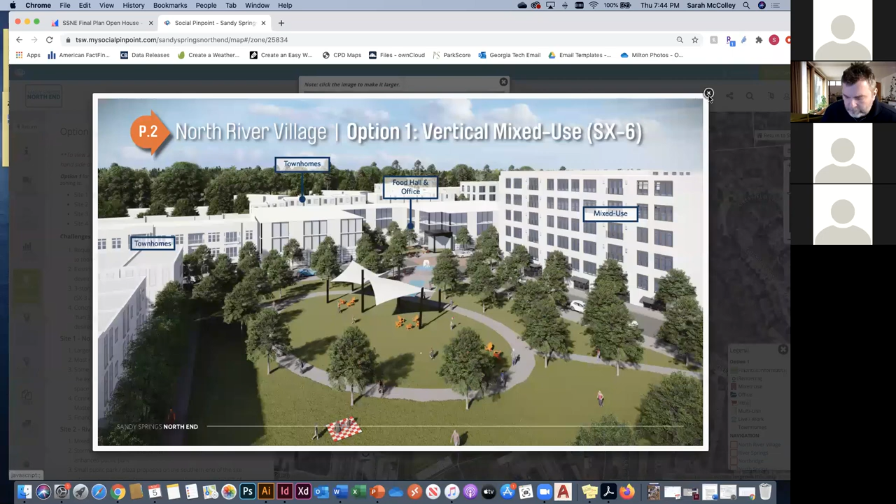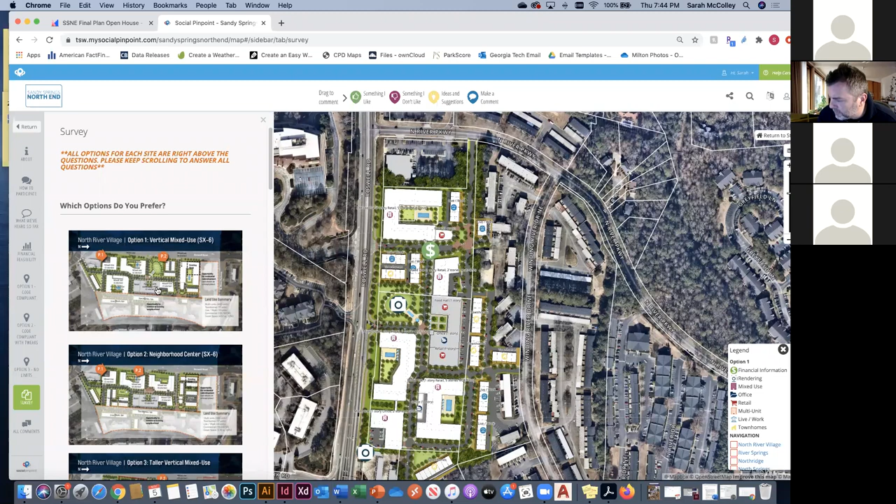Much the same way as before, if you want to leave a comment, drag up from the top onto the map. Over here on the left-hand side, we have our survey questions. We have first all of the options for each site, then the question for each site, and an opportunity for you to tell us why you chose that option or any other comments. If you keep scrolling, you'll see all of them. Finally, once comments start populating, there's a left-hand side list that will show a rolling list of all the comments received on the map.

So I'm going to try to get back into the presentation mode.

The next thing, we will also be at the farmers market on Saturday morning at 9 a.m. We'll have screens up with all of these concepts where you can come talk to us. We'll help you navigate through the online site, and we're just there to answer any questions and hopefully reach more people. We were really hoping that by now we could be in a public meeting forum in person with everyone again, but we found that the virtual meeting and the pop-up could kind of be a compromise for that. Finally, we'll have our council presentation December 15th, and the final document will be done by the end of the year. So that is where we are.

Andrea, do you have anything else you'd like to say? I don't think so. This has been good engagement.

The big thing is, reminder, all of this will be on the city's website. The survey is live right now. A video copy of this presentation will be live tomorrow, and also a copy of this PowerPoint presentation will be on the website. So for any of your friends and neighbors that might have missed the meeting and want to see it, I really do recommend that. I know it was long, and I appreciate you guys staying with us, but there's a lot of information here, as you can see, and some folks really do better seeing things in a visual format. So I highly encourage you to encourage your neighbors to get out, download the presentation, get on the Social Pinpoint site, and give us lots of input.